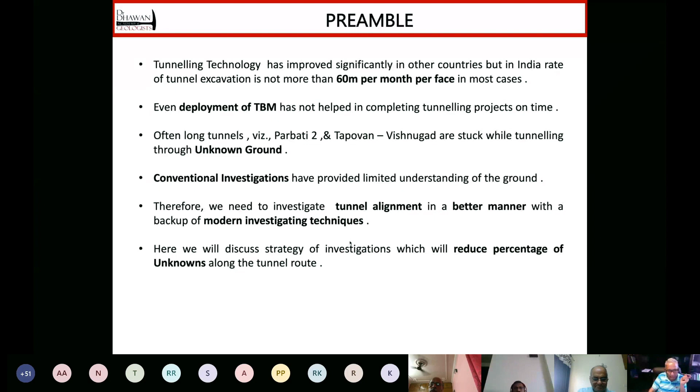Therefore, today we have chosen this topic from the academy to discuss some strategy of investigations which will reduce the percentage of unknowns along the tunnel route. So what are these known unknowns and unknown unknowns?

In the tunneling media, where you know geologically what you are going to get and where you are going to get it, and what would be the properties of those rock mass and rock mechanic properties, these are fairly known. On the other hand, in reaches where the situation is known unknowns, you know what geology you are going to encounter, and you also know what types of problems may occur - suppose you may find repeatedly shear zones, or some high ingress of water zones, or crush zones. So you know these are there in this reach, but where they will occur is not known.

And then there are unknown unknowns - I neither know what I am going to encounter, nor do I know where I am going to encounter it. So these three things: it is understood that known knowns can be dealt with by good design of the rock masses, of the support system. Known unknowns can be mitigated by appropriate contractual architecture. And unknown unknowns can also be tackled reasonably well if we embed the investigation methodology during the construction phase, but still there will be some residual uncertainties.

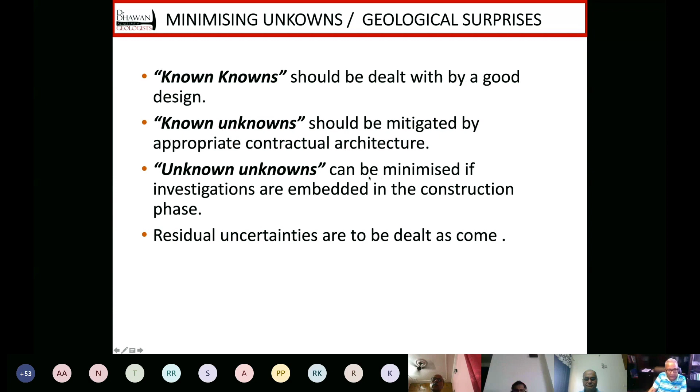Terrain is inaccessible. Geology in Himalayas is not simple everywhere, it is complex. We don't see very many outcrops. It is my personal assessment that in these type of terrains, we don't get more than 3 or 4% of outcrops, and then we cannot deploy deep investigative techniques because of terrain limitations.

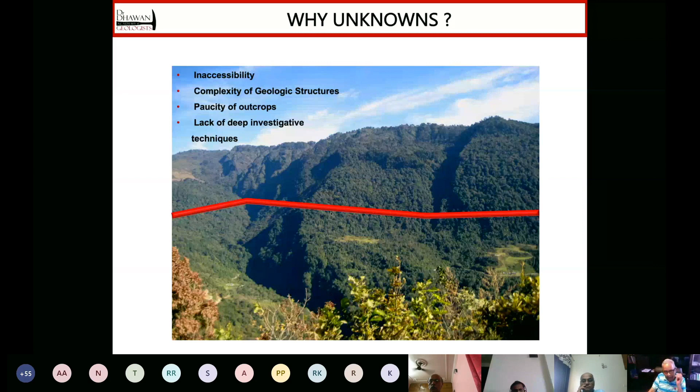This is a live example of a project in Bhutan, known as Chamkarchu project. I was doing investigation of this project between 2010 and 2012, and this picture was taken. So now when we start from here, do some kind of geological mapping and take help of regional geological data also, we get this kind of geological section along the tunnel alignment. It's a very general kind of setup, showing what all you can get.

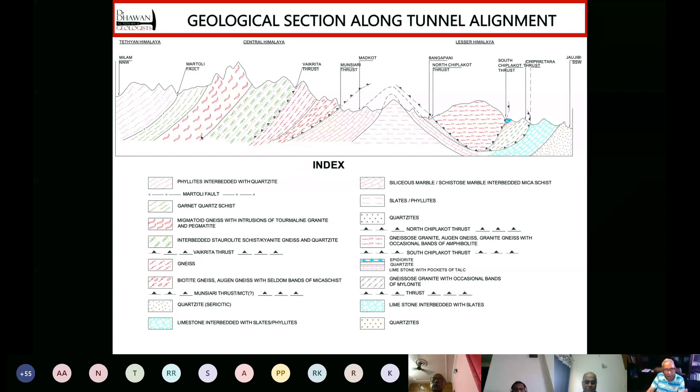So we can define the rock types. We can also define various structural breaks. But within these rock types, for example, say the garnet quartz schist, we know the name of this rock type. But within this zone, there may be 3 or 4 subzonations, which we call geostructural units. That is very difficult to define based on geological mapping alone.

And then based on this data, which is, I mean, there are 3 to 4% of outcrop, and practically more than 50% are not accessible. So based on 1 or 2% of outcrop, we try to project geology all along the tunnel. And then finally, because of some contract requirements and design requirements, we are required to give rock mass classifications along the tunnel route also, and try to prepare these small pie diagrams.

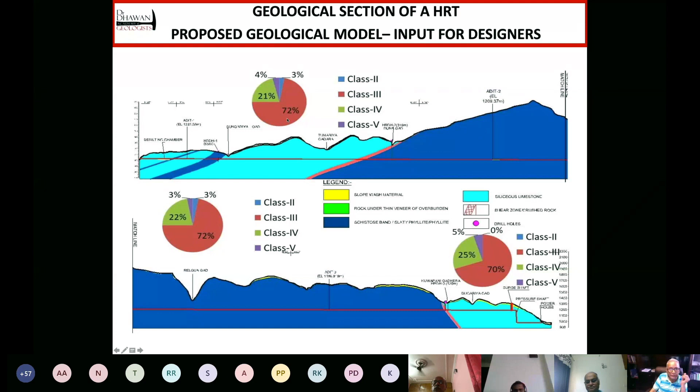But these are sometimes misleading because the designer does not know what are your limitations, and he will go as if these numbers are perfect, and we will get 72% rock mass which will conform to class 3, and so on and so forth.

So in general, if we compare what is the confidence level of a conventional approach, we will see that known unknowns, and unknown unknowns are equally divided. So 33% of the tunnel route, wherever tunnel is not very deep, in those areas which are near to portals, or due to some other reason, rock cover is not more, so we can...

Identify the risk in these areas very well, and we can also design the rock support systems based on projections, geological projections, and rock mass classification data collected during mapping.

And suppose the same geological mapping concept is supported with our strategic approach, you will see we can go up to 60%, not more than that, 60% for known areas. So when percentage of known areas increases, the known unknowns and unknown unknowns shrink. So therefore, strategically planned investigations convert gray areas, and literally the gray areas in the picture also, these are gray, to knowns, to known knowns, to a great extent, not fully.

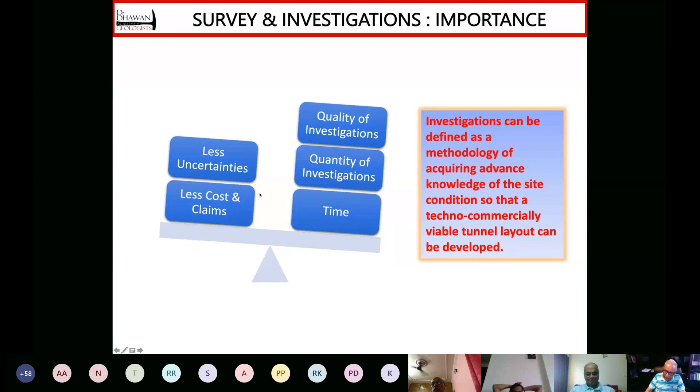So therefore, we are required to develop a good geological model of the area, optimize the suitable layout of the tunnel, and assess rock mass conditions along the proposed tunnel. Foremost is to forecast geological problems which are going to come during tunneling, then design the support and estimate cost and time required for completion of tunnel so that it should not be so squeezed that we are always behind the schedule.

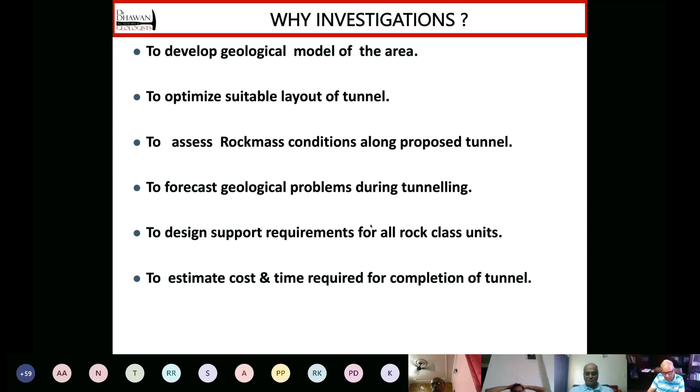So how much can we investigate? Because maybe till now I might be sounding like if we evolve a good strategy of investigations, we can predict 100%. No, that is not true. This is an ISRM figure in which along the x-axis you will find we have plotted acquisition of geological and geotechnical data, and on the y-axis, which is blue, we have plotted percentage of unforeseen problems, that is risk. So you see, as we proceed further along the x-axis, we will see that this blue line slowly comes down and the risk reduces. Theoretically, if 100% data is acquired, risk will be 0%, but it never happens.

And how much can we get? So if you see the other curve, which is brown, you keep on investing more and more money, and with this increase in investment, you get more and more data. But after 60%, you will see that this brown curve becomes almost very steep initially and then almost vertical, asymptotic. So it means that no matter how much money you invest, you can't go beyond 60%. So this is the area of known knowns, which I had shown in the pie diagram, and this is the area of residual problems.

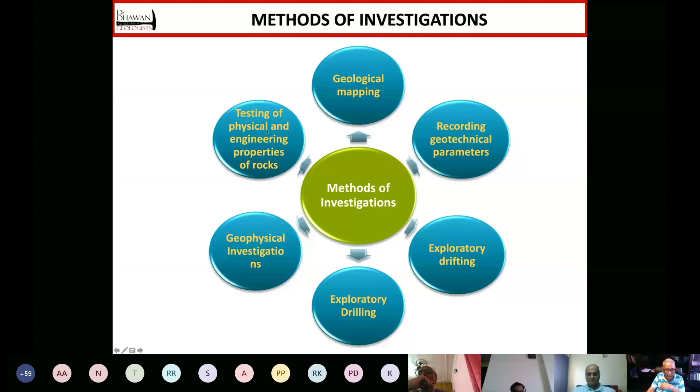In my opinion, we should do a lot of rock mechanic testing. If we can do that, we will be in a position to understand what are the rock types along the tunnel alignment, and we will be able to establish adequacy of rock cover in the low cover reaches. The stress related problems can be forecasted, and expected rock classes to some extent in the known areas can also be assessed.

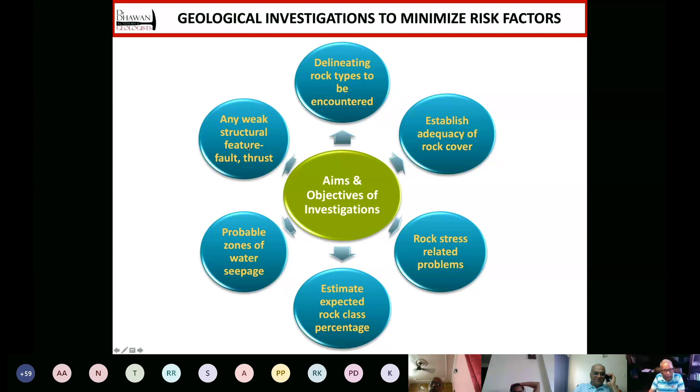And nowadays, particularly in TBM tunnels, we have found that water has emerged as the biggest enemy. So these zones are to be identified, and all weak zones are required to be identified. If we can do that, it will minimize risks.

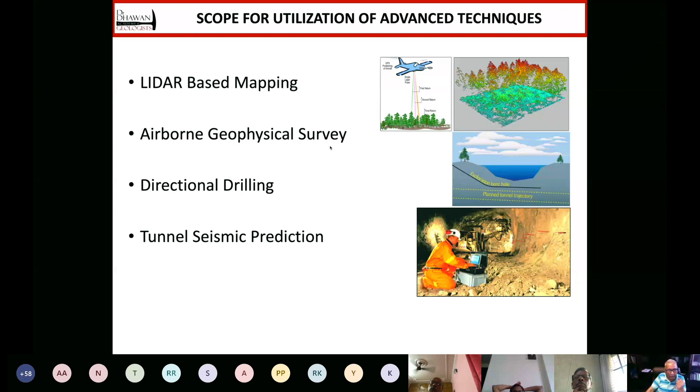Beyond conventional methods, nowadays there are modern techniques which can be deployed, and people are using it day by day. It is LiDAR-based mapping, airborne geophysical surveys. Particularly nowadays in new contracts, we are finding that electromagnetic survey, airborne EM surveys are being applied, then directional drilling and TSP during construction.

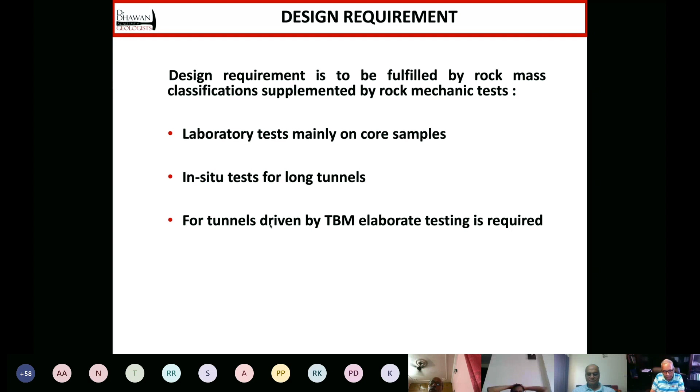There are design requirements also. And for meeting these design requirements, we have to do a lot of laboratory testing, in situ testing. And in case your tunnel is to be excavated by TBM, some elaborate testing, rock mechanic testing, is to be done for collecting those parameters.

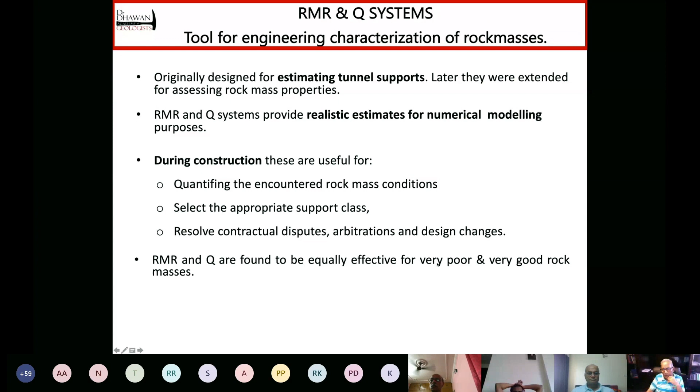RMR and Q system both have emerged as a very helpful tool for designing tunnel supports by empirical methods. Many times people ask questions as to which system is better. In my opinion, both the systems are better, and this is based on a paper by Bieniawski and Barton, which they have written together in 2008, where they state that RMR and Q are found to be equally effective for very poor and very good rock masses.

Then geophysics and exploratory drilling is to be used judiciously. In my opinion, we should go for deep drill holes, and in case we are able to identify the poor zones along the tunnel alignment, all these zones should be investigated by drill holes. Nowadays techniques are available, but in our country I think we are a bit shy in applying those techniques.

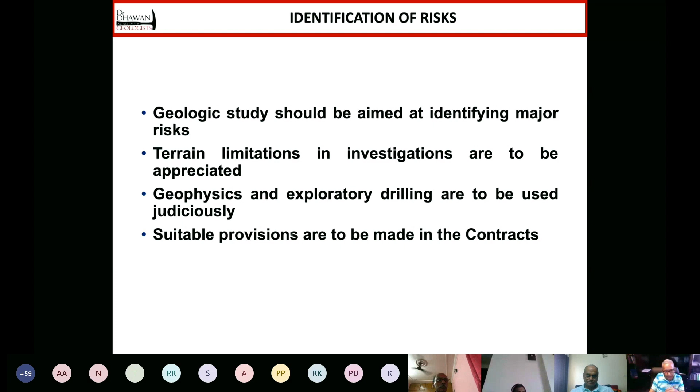Then suitable provisions should be made in contract, because whatever cannot be assessed, in case we cannot forecast with confidence, then some contracts for unknowns are to be kept.

And before starting a tunnel project, we must identify geological and hydrological risks. Some typical risks which we encounter during tunneling are tunnel running into overburden, unexpected fault zones, squeezing and rock burst, and weak zones - sheared, crushed and fractured rock masses.

Then variation in predicted rock classes or rock types affecting the completion schedule, and finally groundwater with high discharge that hampers tunneling work. This was the root cause of problems in Parbati Stage 2 project.

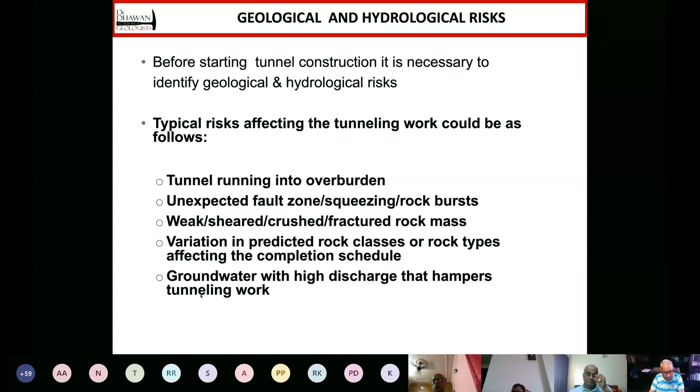Ian Smith has proposed a risk matrix for Himalayan tunnels. What he says is that you first quantify likelihood of a risk, which could be rare, unlikely, possible, likely, or almost certain. And on the other axis, you divide it into consequences from insignificant to catastrophic.

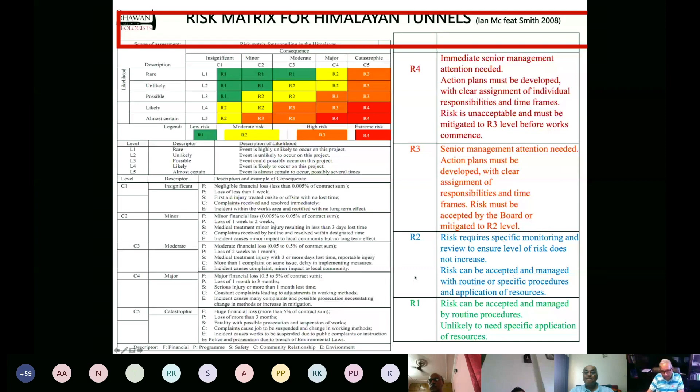And if you do that, this matrix will finally help you in identifying all the risks in 4 categories, and for every category there is an action plan. He has further given description - I have given you about 5 or 6 risks, but he has further subdivided those major risks into subcategories.

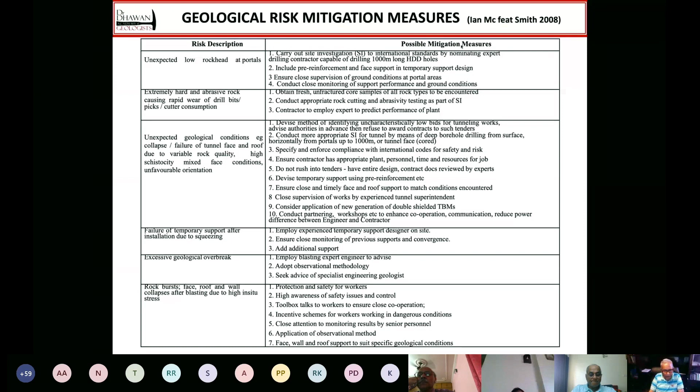And in this smaller column, you will find the risk description and then possible mitigation measures. For time constraints, I will not be in a position to do justice with this, but you can have a look yourself, and it is self-explanatory.

Now what strategy should we do? Here should be our focus. In early stages of investigations, what we should do? In my view, an early reconnaissance visit helps in identifying problems and avoiding problematic areas. Suppose in case of hydropower projects, you can make a tunnel on the right bank or left bank. If you identify the geological risks in advance, you can avoid one of the banks and straight away go to the other bank or go deep inside the mountain. So this is how the initial reconnaissance visit will be helpful.

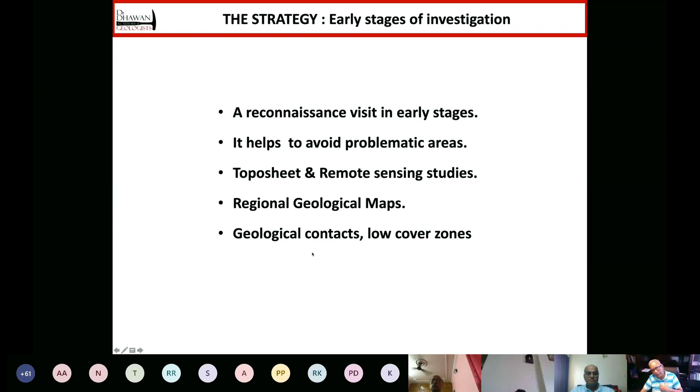Before this, we should have good topo sheet studies, remote sensing studies, and all available regional geological maps. Luckily, in our country, the Geological Survey of India has done geological mapping of almost the entire country, maybe about 99%. So for all areas you get some regional map, and there are other maps published by other researchers. All this literature survey should be done, and based on that we should identify geological contacts, low cover zones, and particularly all the weak zones and thrust areas. In many cases, major thrusts in the Himalayas are associated with thick shear zones or crushed zones.

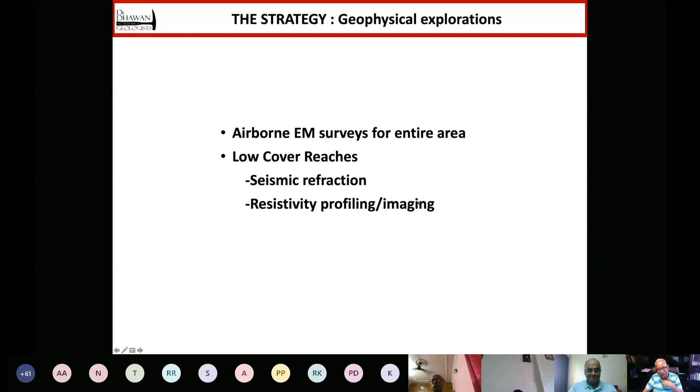Before launching the feasibility stage of a tunneling project, we should initiate an airborne electromagnetic survey for the entire area. It is very useful in the Himalayas. And for low cover reaches, we can also employ seismic refraction surveys, resistivity profiling or imaging, or other kinds of geophysical surveys. These can be deployed in tandem, and then integrated with the geological data.

After doing this, when we initiate the actual feasibility stage, we should start with a good engineering geological map, which we call EGM. EGM on a 5000 scale is good enough, and this EGM has to be integrated with geophysical results and remote sensing data. An overall geological model is developed, and rock types expected in the tunnel are identified. Geological contacts are established again, because initially what you did was based on regional geology. Now, based on your own geological mapping, you will identify contacts of your geostructural units for further studies during the detailed investigation, then rock mechanic testing and petrology for various rock units.

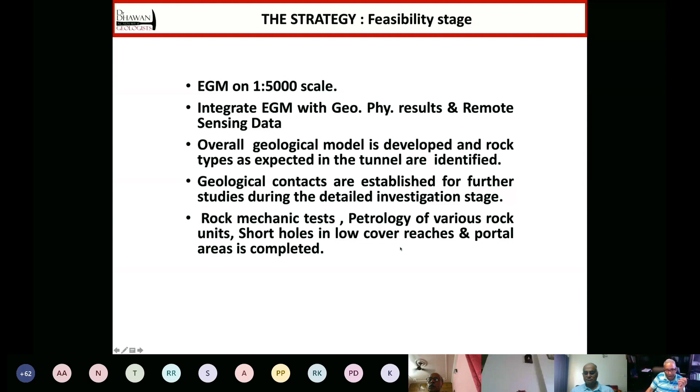Then some short holes in the low cover reaches and portal areas are to be completed during this phase. With this background, when we embark upon the detailed investigation stage, we will have geological and geotechnical maps, but these are to be reinterpreted in light of fresh data, particularly after integration of exploratory drilling, short holes, and rock mechanic testing. This is the stage when geotechnical assessment and rock mass classification is developed for each geostructural unit.

A geostructural unit means a unit in which you will have the same lithology, same jointing pattern, same nature of joints, aperture, spacing, and other joint properties should also be the same. It should have more or less the same uniaxial compressive strength. So based on whatever data you collect during your outcrop survey and whatever rock mechanic testing you have done, you need to identify these geostructural units on your map. In other words, on an EGM, these are the smallest mappable units.

Rock mass classification for known conditions greatly helps in estimation of rock support and whatever treatment is required. Why have I taken out this 'known conditions'? Because after doing geological mapping, rock mechanic testing, remote sensing, some deep drilling, and geophysical surveys, most of the areas will be converted to known areas. And if you know the properties of the rock mass, a good designer will give you a good tunnel supporting system in advance. In case you keep on providing your support system in time, there is a high unlikelihood that you will fall into trouble.

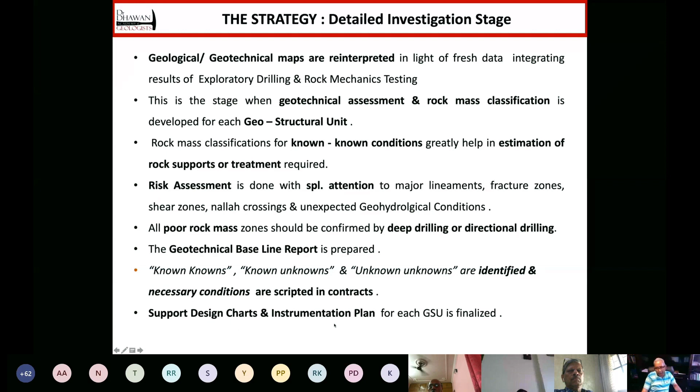Finally, with all this database, good support design charts and an instrumentation plan, which is very important for any tunneling method, can be evolved for each GSU, or geostructural unit.

This is a flowchart developed by me during my PhD, which was on tunnel support systems and rock quality parameters. In the central portion, we segregate data which we collect on outcrops, and for each geostructural unit, we segregate the geotechnical data. Out of this, we take out the orientation readings, and in this vertical, finally we do structural instability analysis.

In the central portion, we classify this data for rock mass classification and evolve the support design by empirical methods, whatever empirical methods are available to us, taking help of the Q system, RMR system, and GSI system.

And in the discontinuity orientation analysis, we do structural instability analysis and evolve a support design for kinematically feasible blocks — you mean wedges, various kinds of wedges.

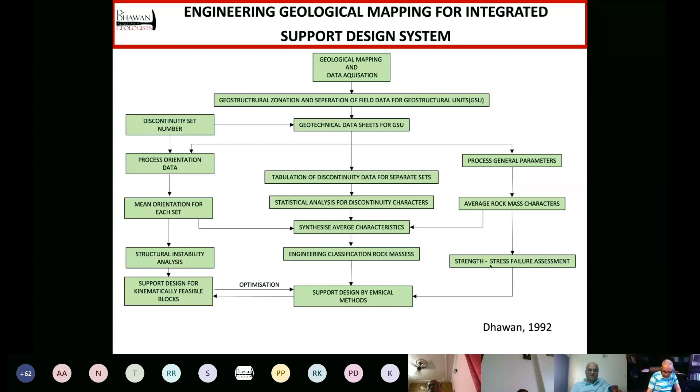And the general parameters, particularly rock strength and the height of the overburden cover, will help you in defining the strength-stress failure assessment. And all three, if they are integrated together, will optimize your support system.

So with this, I'm almost towards the end of my presentation. And before I conclude, I would like to say that we should investigate adequately, and we should do all essential testing. Because in my personal opinion, if I take the example of a hydropower project, we investigate dams and powerhouses reasonably well, but tunnels are somehow not given the due importance. So for tunnels also, we will have to do a lot of rock mechanics testing as proposed in this strategy.

And then we should be ready for mid-course correction in the contract. Adequate clauses should be built in for mid-course correction in the contract.

Then a right agency for long tunnels is to be identified, because the contractor should be good. And prepare a risk management plan for all difficult stretches which you are going to encounter. Quick decision is key to the success. If we can do that, we will be in a position to complete our tunnels reasonably in good time.

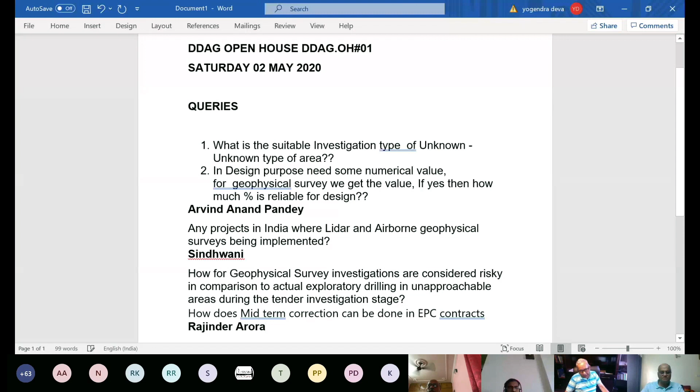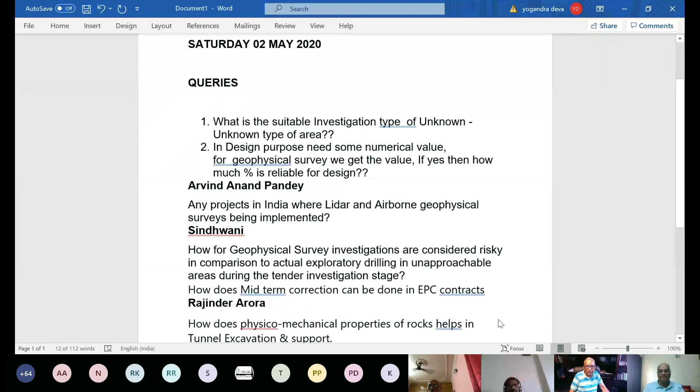But as a word of caution, I would say that in case you have to select parameters for numerical methods, nowadays apply Hoek and Brown's criteria, the GSI criteria - Geological Strength Index. It's quite useful. There are certain softwares which give you rock mass parameters based on your inputs of the rock mass, and then you should always calibrate whatever data you are getting through these empirical methods with your actual rock mechanic testing in the sample areas.

The second question is, any project in India where LiDAR and airborne geophysical surveys are being implemented? As far as my information goes, not in India. LiDAR is being used extensively in Nepal in many projects, and people are claiming success of that.

As far as airborne geophysical surveys are concerned, in NHPC we have used these methods for defining the low cover reaches, particularly for assessment of overburden, and also we are using TSP in a very convincing manner. But nowadays actual geophysical application is being done by a lot of transportation tunneling agencies, wherein I find that EM surveys have become almost an integral part of investigation programs of contracts coming from NHAI.

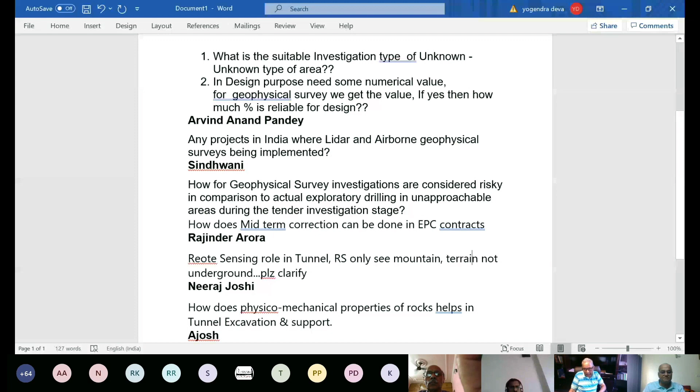NHAI - so day by day, people are using it. Then it was perhaps asked by Mr. Sindhwani: how far are geophysical survey investigations considered risky in comparison to actual exploratory drilling in unapproachable areas during the tender investigation stage?

You see, geophysical surveys have their own limitations, there is no doubt about it. But you have said unapproachable areas, and believe me, having investigated several tunnels, there are areas where even goats cannot go, leave apart human beings. So how can you take big drilling machines into those areas? In case you can't do anything else, geophysics is certainly better.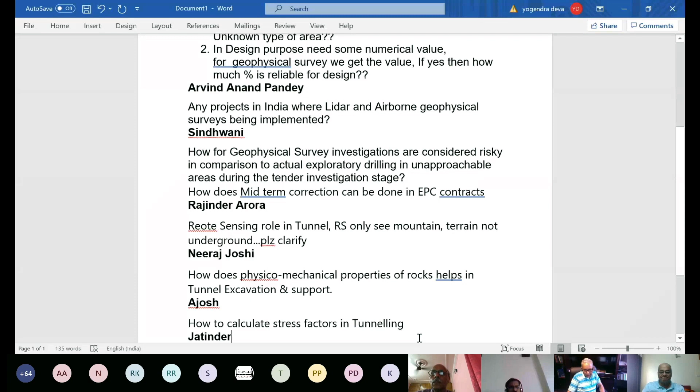And in case you can calibrate your geophysical results in the known areas - like you do ground truthing in remote sensing - geophysics has to be integrated or calibrated with the known geological areas. I have seen that many times there is hesitation on the part of geologists to part with their data, and they say, first let the geophysics give us their result. But in my view, we should share our data with the geophysicist so that he can calibrate.

I think Mr. Rajinder Arora will be happy with this answer.

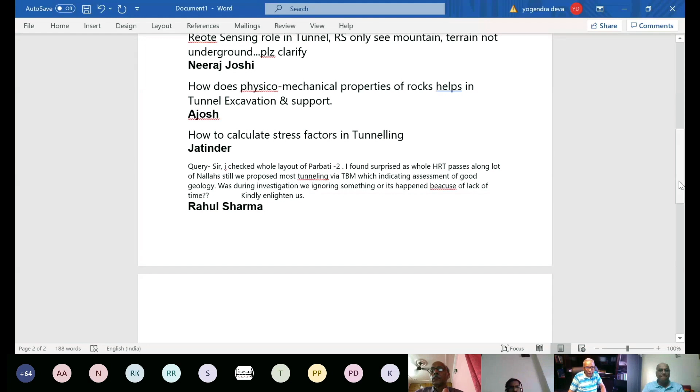And the screen is moving. I think a few questions are skipped, Mr. Deva. And I can now see the question from Mr. Ajosh - your screen is moving very fast. Just hold it here, I think I can take a question from Mr. Rajinder Arora, which is a bit long.

How far geophysical services - okay, this I have answered. Then remote sensing, I think it is wrongly spelled: remote sensing's role in tunnels. RS only sees mountain terrain, not underground - please clarify. I find it difficult to understand what Mr. Neeraj Joshi is asking. I can understand he is asking about the role of remote sensing.

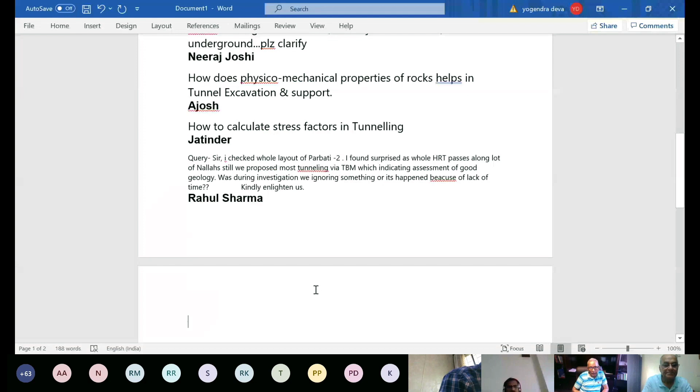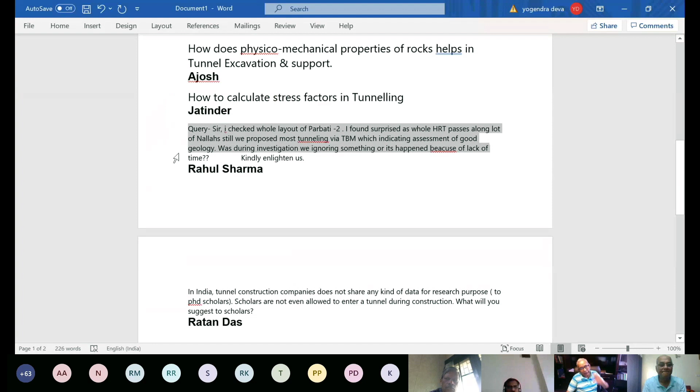Mr. Joshi is asking about the role of remote sensing in tunnel construction, particularly noting that remote sensing only sees the mountain terrain. How can you predict the rock mass which is underneath, since the tunnel is to be constructed underground?

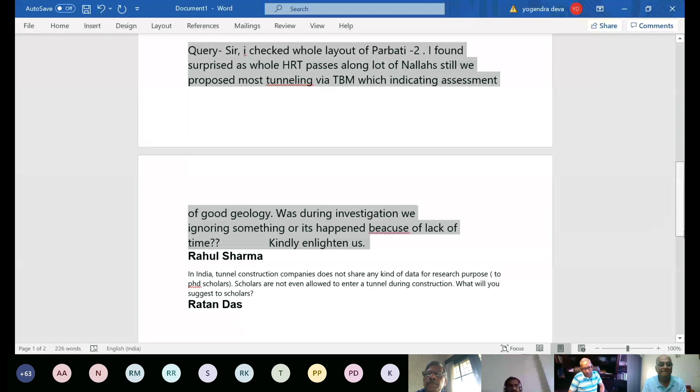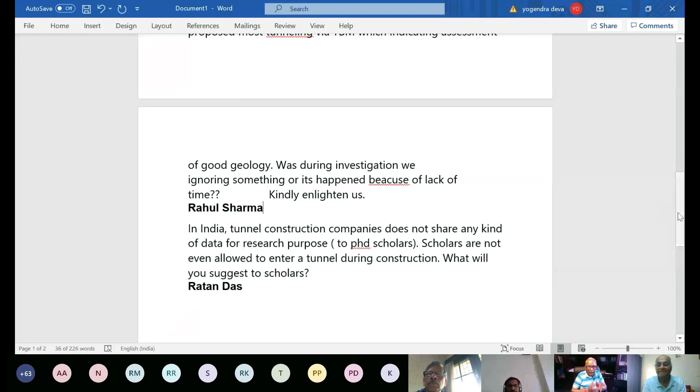Mr. Joshi, a remote sensing expert could clarify this better, but as I understand it, remote sensing first gives a good lineament map, which we perhaps cannot get if we map the area on a very big scale. The advantage of remote sensing is you can see the entire area synoptically, and nowadays there are imageries of very high resolution along with very powerful software.

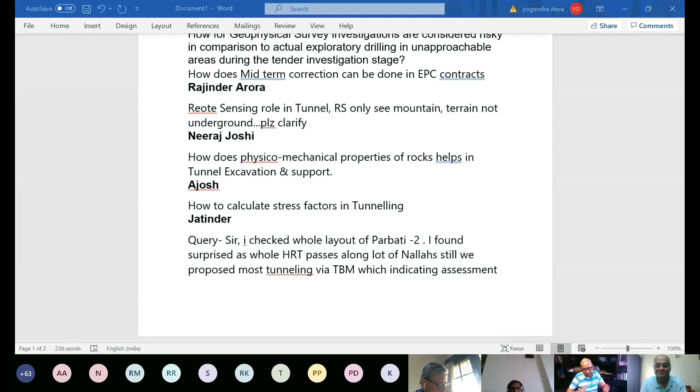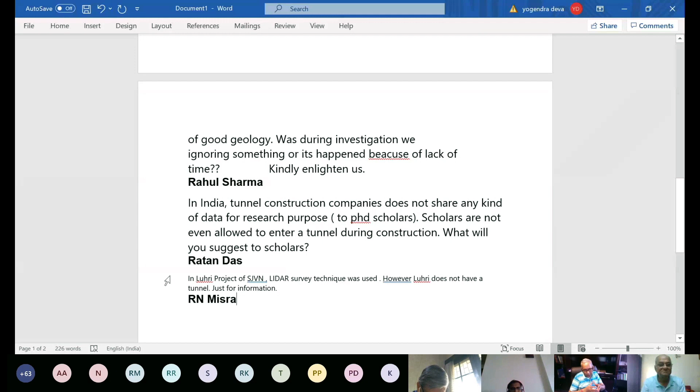It will be very helpful to calibrate your geological map, particularly for areas you could not access. Once your map is updated, it complements your geological map. With some software, if you do photogrammetry, you can even see the dip and strike of rock formations. Remote sensing is not complete without integrating ground geology, but it does wonders in updating your geological map if deployed properly using available GIS platforms. It is useful, this much I can say.

Then the second question, from Rajinder Arora: how does midterm correction work in EPC contracts? Would you like to comment on that?

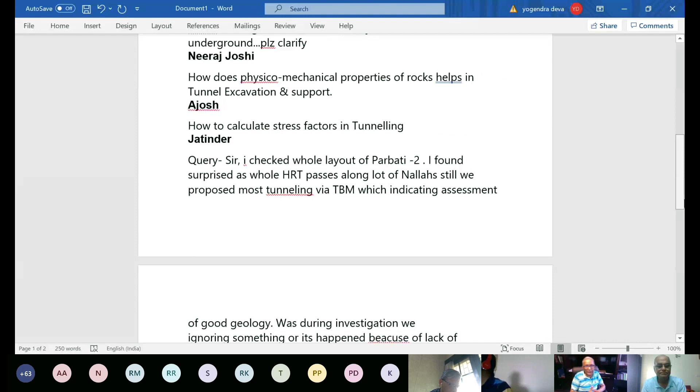Yes, wonderful. In an EPC contract, it is a bit difficult because you have given the complete contract. But while giving the EPC contract, if you build in a condition we call EGC - extraordinary geological conditions - for meeting any condition that perhaps cannot be predicted in the early stages, then let there be some risk sharing by the owner also. If that is done, I think that will be a kind of midterm correction. But it is certainly difficult.

Maybe, Deva sir, you could allow Mr. R.N. Misra to answer this question. He must be listening, or can comment at the end. Sir, can you hear? We can call him later. We have only 4 minutes left. You can call me later on. Mr. Sir, you can come right now if you want - an intervention from your side will be helpful.

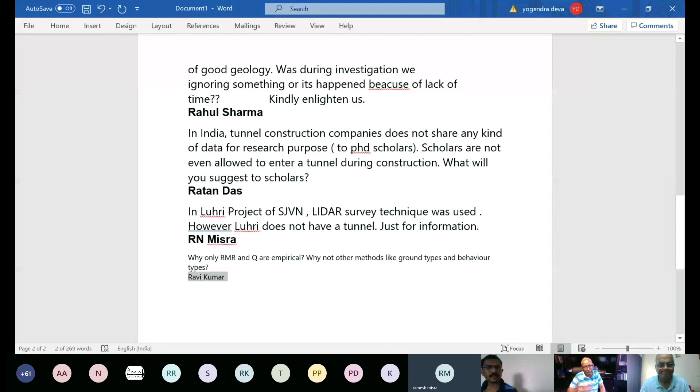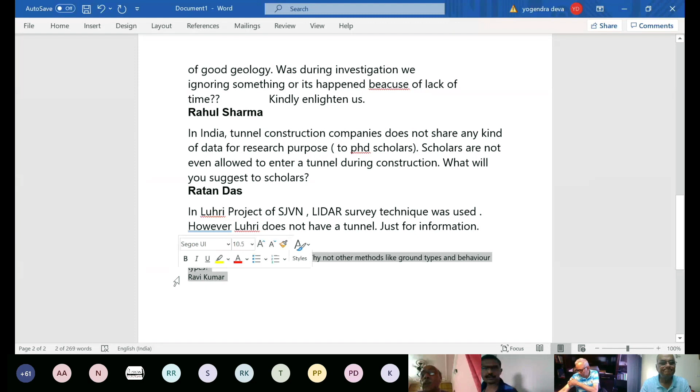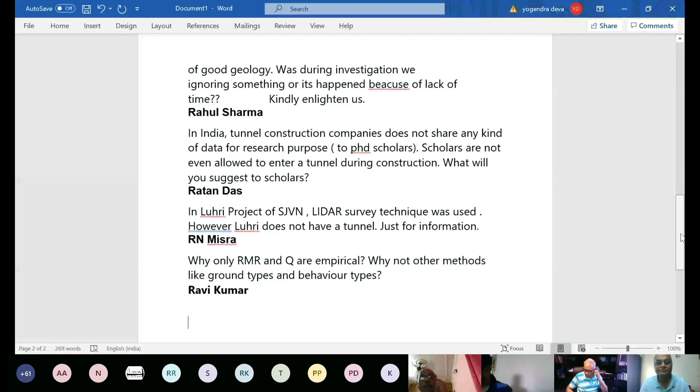You are right that in the EPC contract there are normally no provisions for such conditions. But one thing is there - in the EPC contract, normally the contractor is supposed to have done the investigations themselves, and they give the design and other things. Therefore EPC contracts assume the contractor has already accounted for uncertainties while bidding. But sometimes such a condition may arise, and at that time only the mutual wisdom of both parties can help - understanding that this is a condition which could never have been considered or anticipated. So we negotiate it, though it may be out of the contract. That mutual understanding can only work under existing provisions of the contract; otherwise such a thing may not be possible.

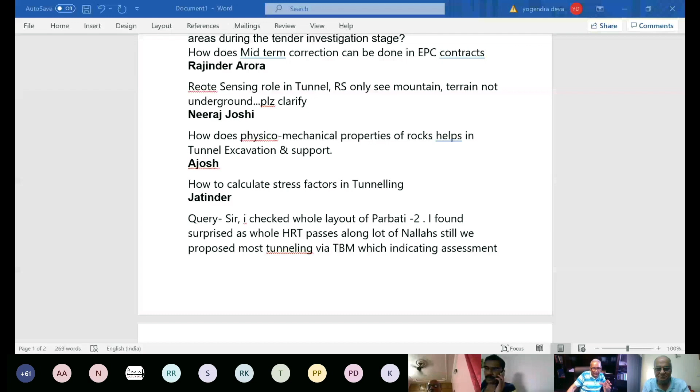Then, how to calculate stress factors in tunnels? Generally, because these are under very high mountain covers, the vertical cover taken from the rock cover - the height of cover into gamma - is sufficient to estimate the stress factors. In case you apply Barton's Q system, you can follow his system also.

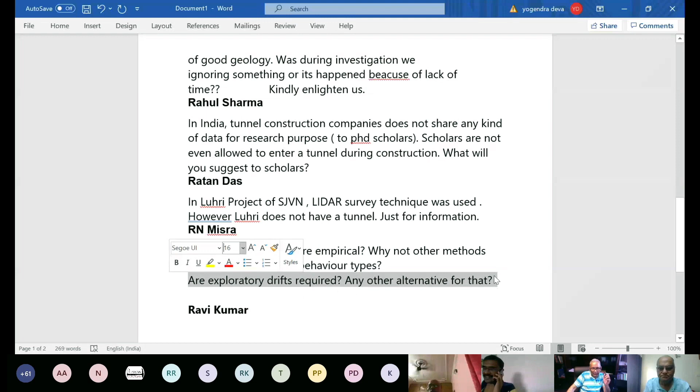There are so many other questions, but some are missing. Rahul Sharma is asking about tunnel construction companies in India. Your screen is moving very fast, so I can't focus on the question.

Somebody has asked, I checked the whole layout of Parbati 2. I found it surprising that the whole HRT passes along a lot of nalas. Still, we proposed most tunneling via TBM, which is indicating assessment. Anyway, what the question wants to say is when there were so many nalas, why the tunnel was laid in this mountain, and if it was laid, why TBM was deployed.

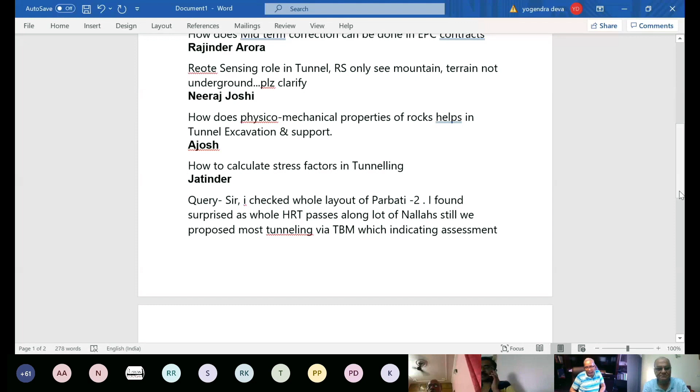In Himalayan terrain, you can't find even half a kilometer of slope where you will not find small or big depressions. Nalas are not enemies of tunnel alignment. Even in Chamera stage 1, the entire tailrace tunnel has been excavated below the Ravi river. The only thing is you should know what is there inside the nala, under the nala.

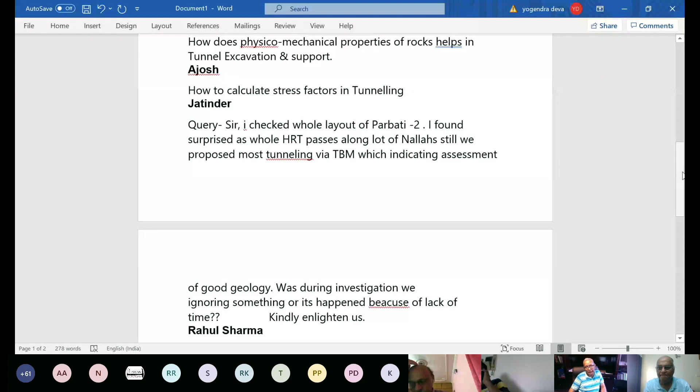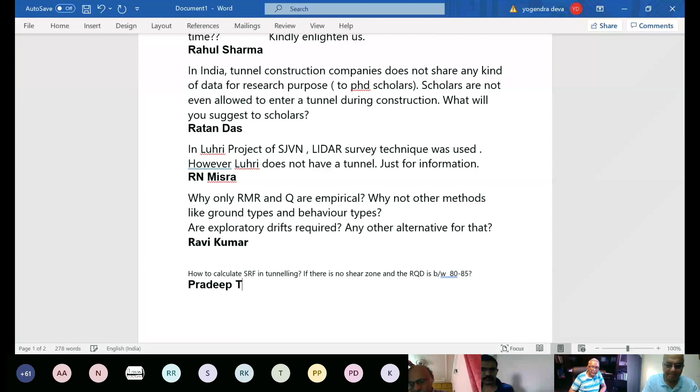A lot of nalas have been crossed without any problem. The problem which occurred in Parbati was not directly related to any nala alignment. These are professional hazards, and you have to take a decision because selecting a tunnel alignment is not only based on geology. You have to consider so many other factors. I think we can take this question in more detail if time permits, but I will have to proceed to some other question.

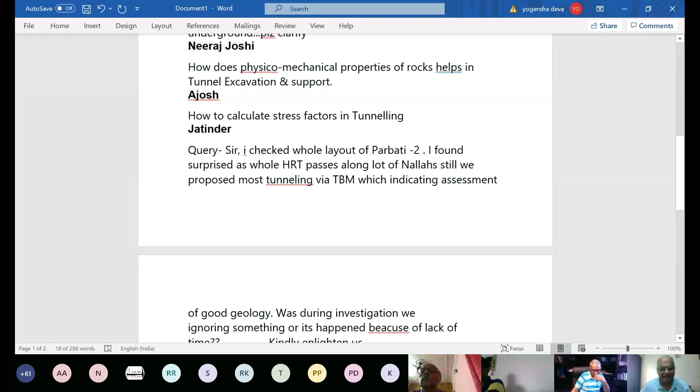There's one from Jatinder: how to calculate stress factors in tunneling? I have answered that already, I'm sorry.

Now from Ratan Das: in the Luhri project of SJVN, LiDAR survey technique was used. Good information. However, Luhri does not have a tunnel, just for information. The only thing I would like to know is whether there was a tunnel or not. LiDAR is not always used only for tunnels; it is a faster method of doing topographic surveys.

What we want to know from you, and if you can answer through the chat box, is how reliable was this survey for the Luhri project? So there is a counter question from Mr. R.N. Misra. Misra ji, that's a good intervention from you once again. But was it really reliable?

Actually, the LiDAR survey was done at the time of preparation of the DPR, and as I understand, it was quite fast and quite reliable also. But this was done at the stage of DPR; the project had not come into construction at that time. Still, it was quite fast and reliable. Thanks for your update - that is the basic purpose of this, fast and reliable.

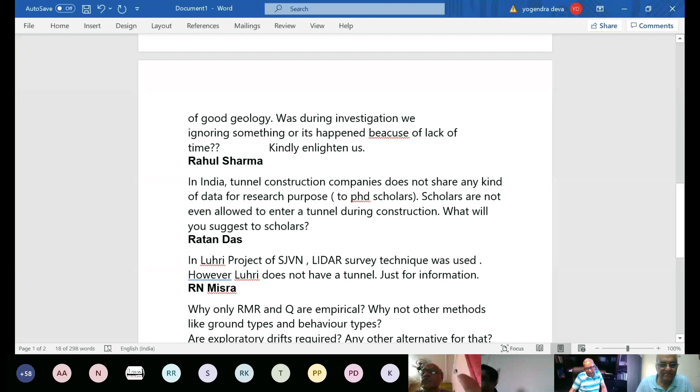And in Nepal, I have seen some projects where reliability is also good. We are left with only 3 minutes, and there are only 3 queries left. One by Ratan Das: in India, tunnel construction companies do not share any kind of data for research purposes. Scholars are not even allowed to enter a tunnel during construction. What will you suggest to scholars?

I think that's a wrong approach, that tunneling construction companies - rather, in my opinion, they should do a lot of R&D, and they should utilize committed research scholars who are ready to help them. In my opinion, these research scholars should somehow force their universities to have good interaction with the industry and try to take up projects which are of some industrial value.

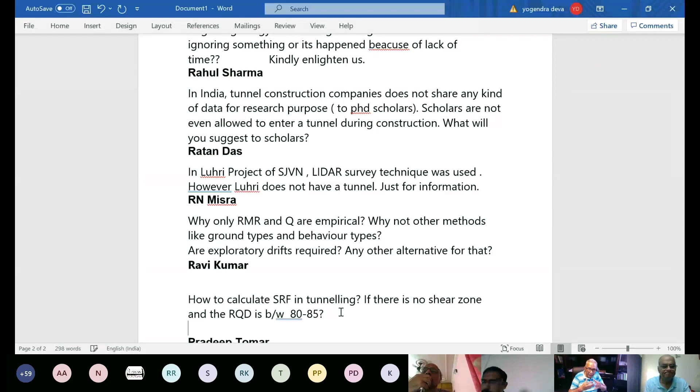Sometimes later we can work on it. In the mineral exploration field, particularly in the Himalayas, there is a lot of industry-academia interaction, and there is a fund which is given to the industry for research only. So some kind of model can be evolved. So this is one.

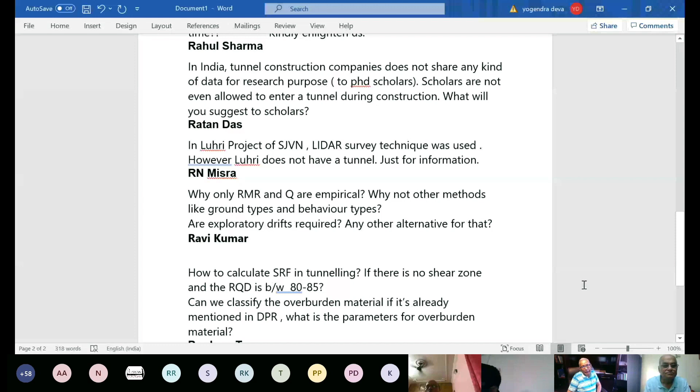And now in 1 minute, I would like to answer Mr. Ravi Kumar, who asks why only RMR and Q are empirical - why not other methods like ground type ones? Wonderful suggestion, Ravi. You see, certainly ground type and behavior types are very, very useful. We call it GTBT. GTBT is coming into vogue in a lot of highway tunnels nowadays.

But the problem is what I have experienced, particularly in the tunnels being done by NHAI at a lot of projects.

In contracts, a lot of work has been done on GTBT, but finally the geologist on the ground falls back on RMR and Q for identifying ground type. So somehow in India this philosophy has not percolated on the ground in a better manner. We have to educate our people in a way so that they apply GTBT for the purpose for which it has been designed, because the number of rock classes are much more in GTBT than RMR or Q. We can discuss this further on telephone.

Are exploratory drifts required? Any other alternative for that? Exploratory drifts are not required along the tunnel alignment per se. The alternative is deep drilling. If you see the case study of Gotthard Tunnel in Switzerland, a 1.5 kilometer thick marl zone, which was very soft, was predicted during the investigation stage, and they drove a directional drill hole piercing this 1.5 kilometer thick zone. If we can do that, nothing can beat it. Drifts could be useful only in the portal areas, or maybe selectively in some low cover zones.

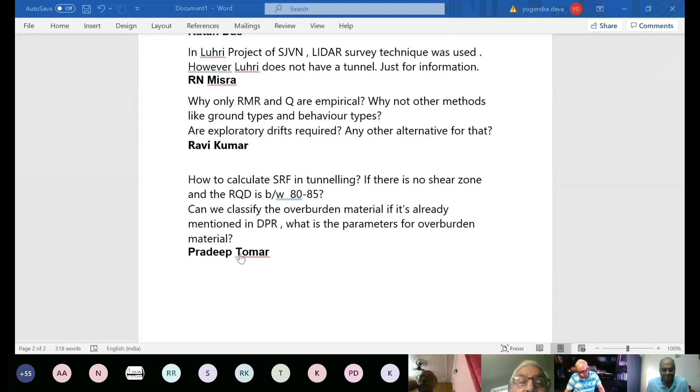Well, the practice which I see normally is that geophysical agencies provide the EM data to the departments, and now it depends from project to project and formulation of contract based on requirements of those agencies. If you wish, you can ask them to do some kind of ground truthing and express the confidence level, or otherwise you take that data from them and integrate it with your geological map yourself. It all depends, this is a very latest practice which is coming to India, and I think we have results of only one or two projects as of now, so we need to see how well it is integrated.